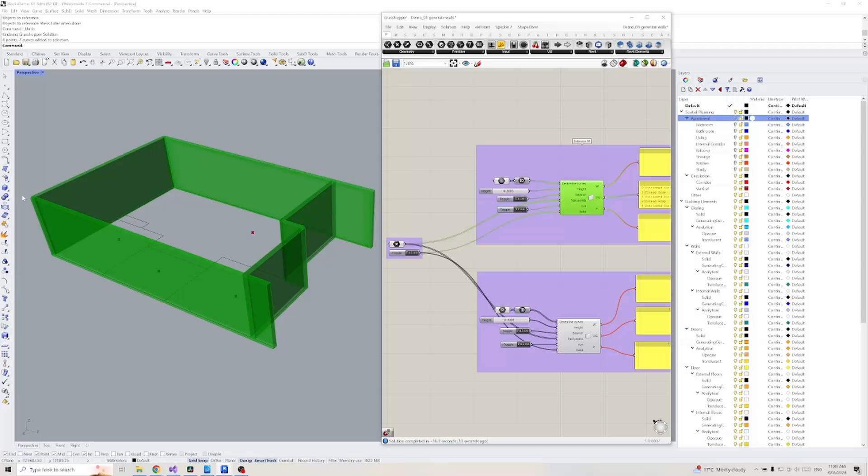On the last episode of Parametric Promethean, I showed you how I can draw lines and polycurves in Rhino and turn them straight into walls and rooms in Revit, and you can't, because you don't have access to my custom components, and I haven't found a way to sell them to you.

If you don't know what the hell I'm talking about, go back and watch that now. I get it, everything's made of glass!

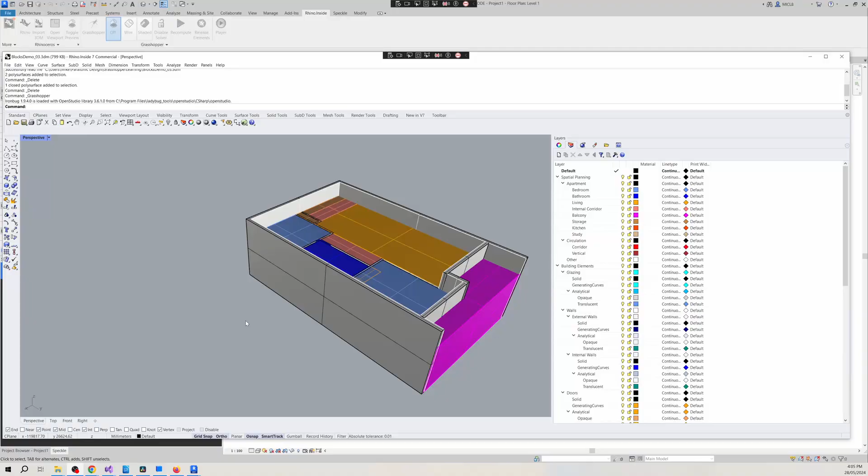Last time we got up to about here where we had our rooms and our walls. There's something not quite right about this building. It's flawless. No, I don't mean it's perfect, I mean it doesn't have any flaws.

All the walls and the rooms are just going to fall down. Luckily, Rhino doesn't have to conform to the laws of physics.

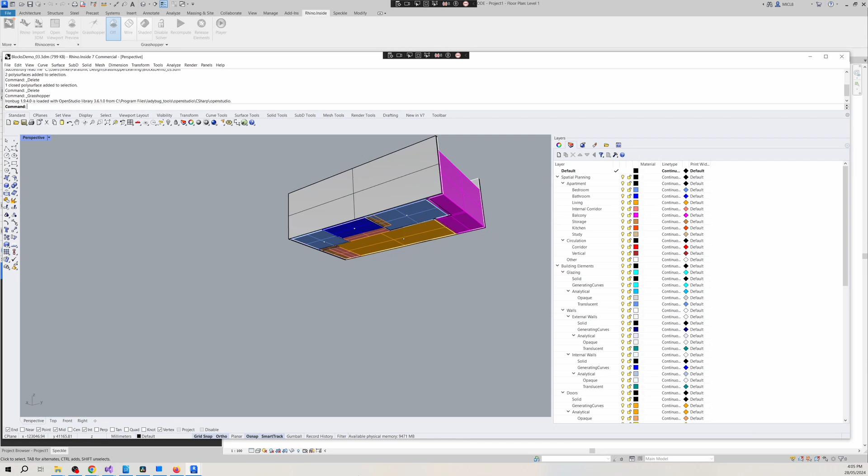But let's put a flaw in anyway. That's why I created the Create Flaws custom component.

As most of you probably already know, in Revit we typically draw flaws using this tool. But just in case there's anyone who's a total Revit noob watching, I'll dumb it down for you. Go to the Architecture tab, click Flaw, dropdown, Flaw, Architectural.

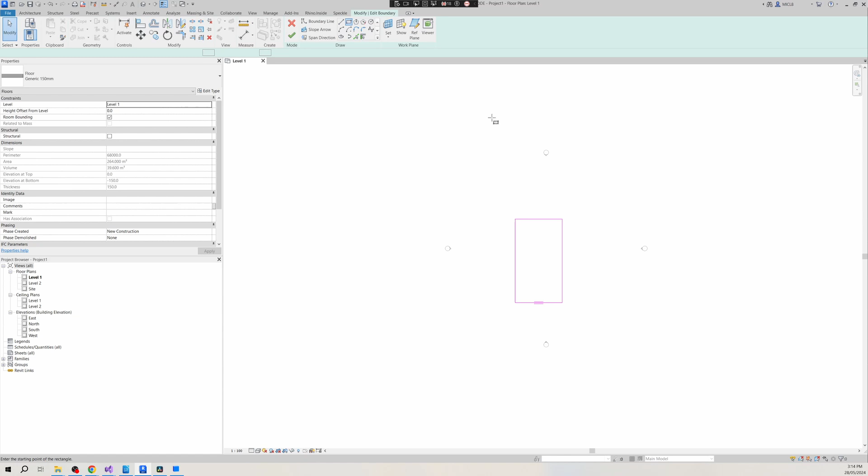Draw a rectangle with a magenta line, hit the green tick button. Hey, we have a flaw. But sometimes Revit flaws are actually composed of multiple objects. See? It's one element, but it's got two different solids in it.

And that's why converting from Grasshopper is not as straightforward as you might think, if you just had one solid compared to one element.

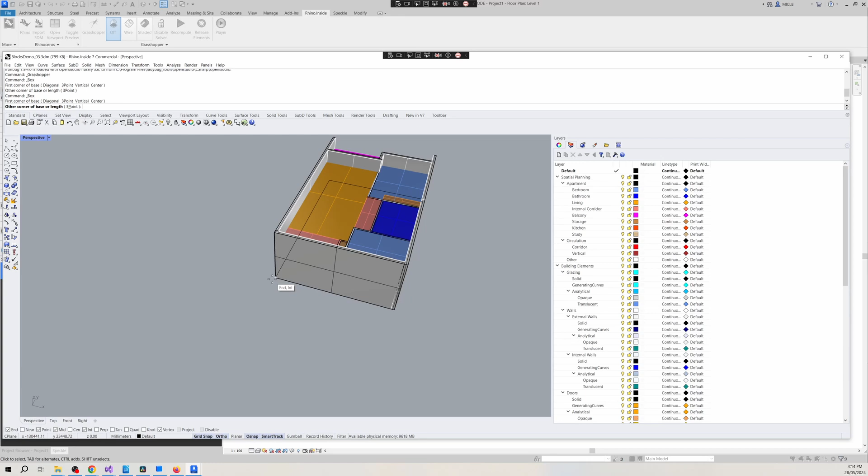We could generate this in Grasshopper, but for the hell of it, let's just draw it manually with the Rhino out-of-the-box tool. Just get this box, draw an extrusion, let's make it 200 millimeters. And we're going to need a ceiling as well, so we can just copy that upwards.

Actually, that probably pissed off some of the Revit pedants out there. That's not a ceiling, that's just another floor on the next level.

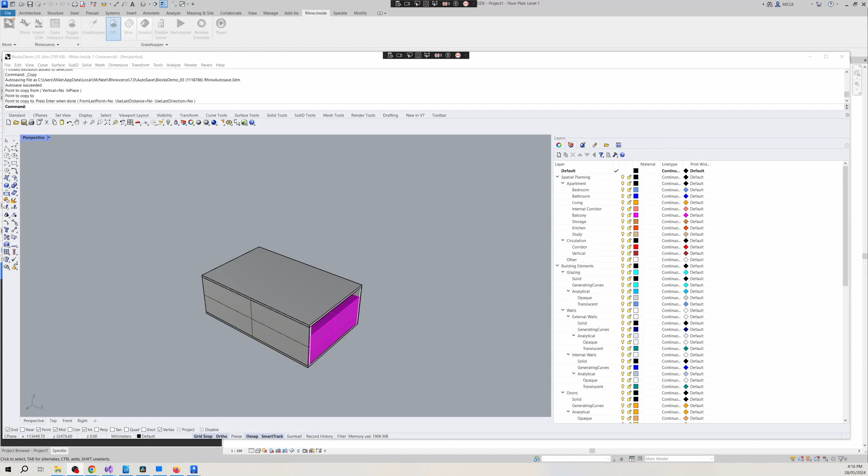And just to illustrate a point, I'm going to grab this and make a couple more of them, just put them over here. Let's go to our gumball, and just so you know they're not the same one, we'll stretch them.

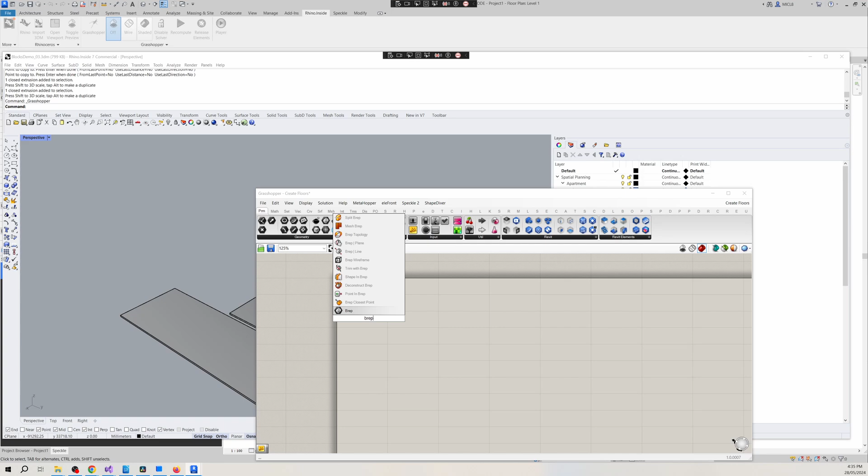Okay, we're going to bring these in as breps. Tango, I thought you said you weren't co-hosting.

And we're going to be building a Grasshopper tree structure. There's a few ways to do this, but I like to use this stumpy one over here: flatten tree.

And let's give it a panel so we can give it a number. Shrink that down. Let's add another panel so we can see the output.

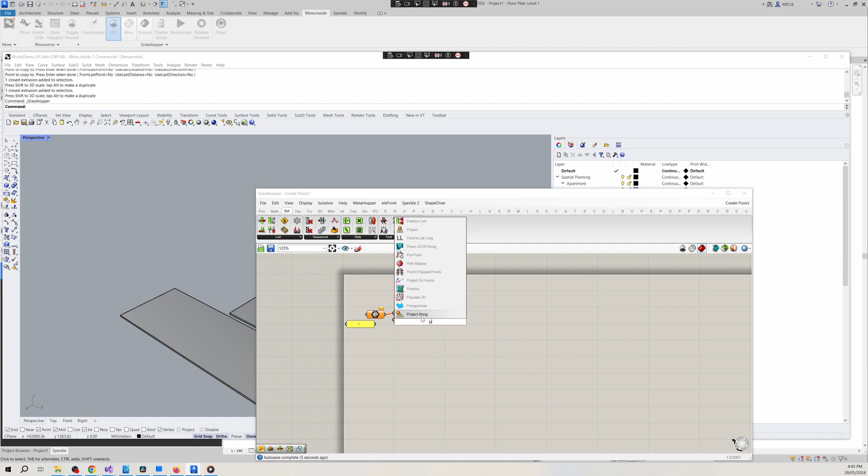Let's set that one brep. Okay, bring that back. Now let's group that together.

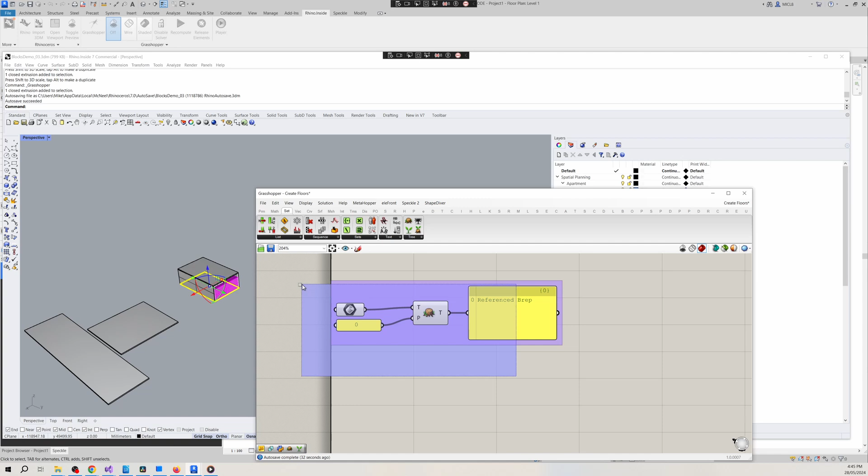Make these line up pretty for all the people out there with OCD. Okay, let's make 3 copies of this one.

And we're going to name them 1 and 2.

Now this one we are going to set to be the one on top, and the other 2 are going to come here with a set multiple breps.

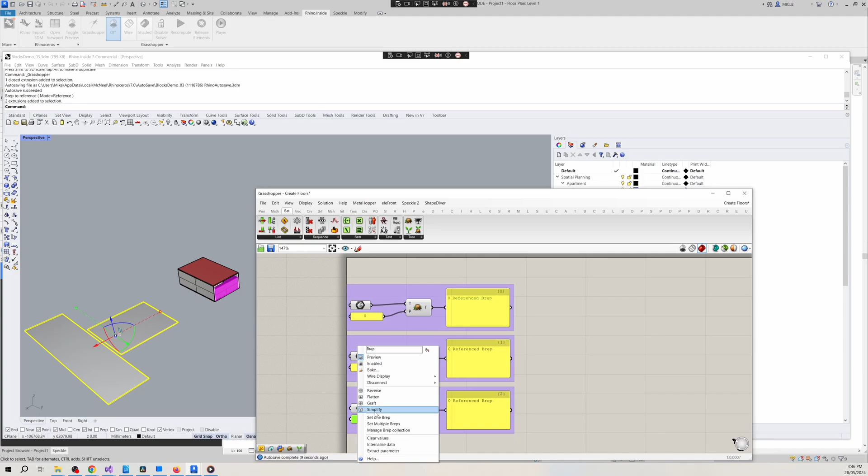We're going to get one of these squid thingies, and we're going to build a merge. For some reason it always adds an extra one, which is a bit annoying, but anyway.

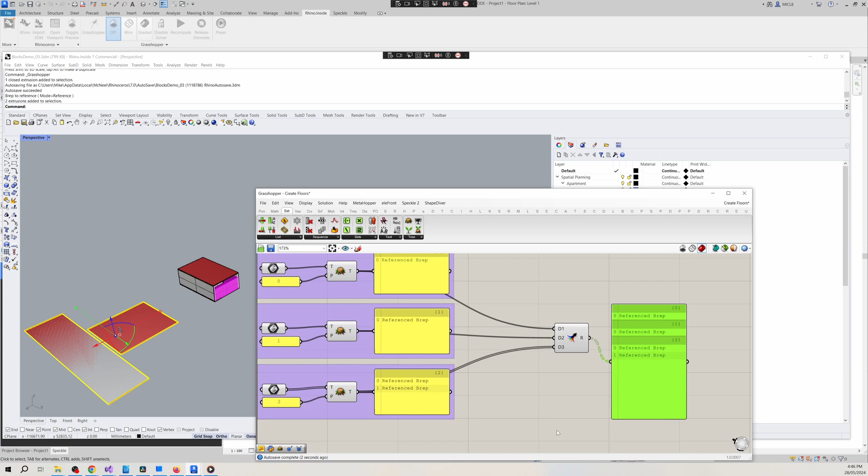So now we can see that we have 3 branches to this tree. The first 2 just have 1, and the third one has 2.

So now that we have our geometry sorted into a tree, it's time to use the New Floor Blocks component. This takes in the geometry as a tree, and it takes in a boolean for whether it's exterior or interior.

Now this is going to be useful later when we're going to do our environmental analytics, because an exterior floor would be something like the part of the slab that is on a balcony, which would form a shading, whereas the interior floor might be the thing we're actually trying to analyze the lighting or the thermal performance. That'll be in a future episode.

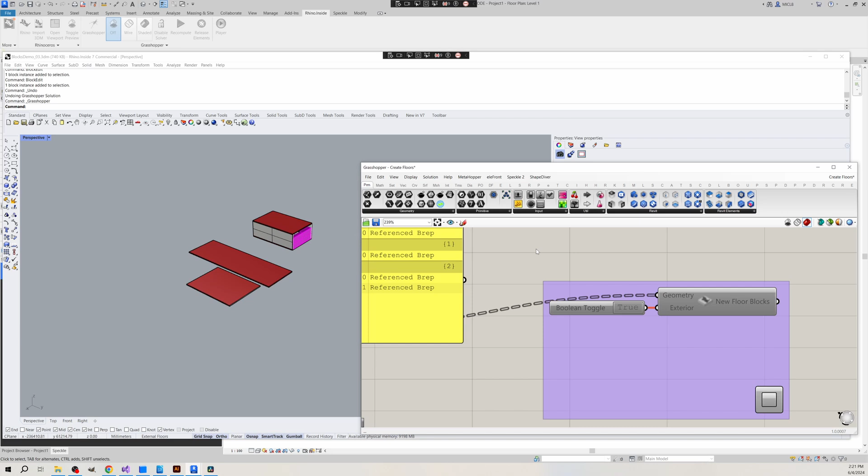Hit the boolean toggle, and here we go, we've got our floor blocks. So you can see that they're numbered. They're on external floors because we said they're exterior. And in the user strings, we've got some metrics like the volume, the perimeter, and the area.

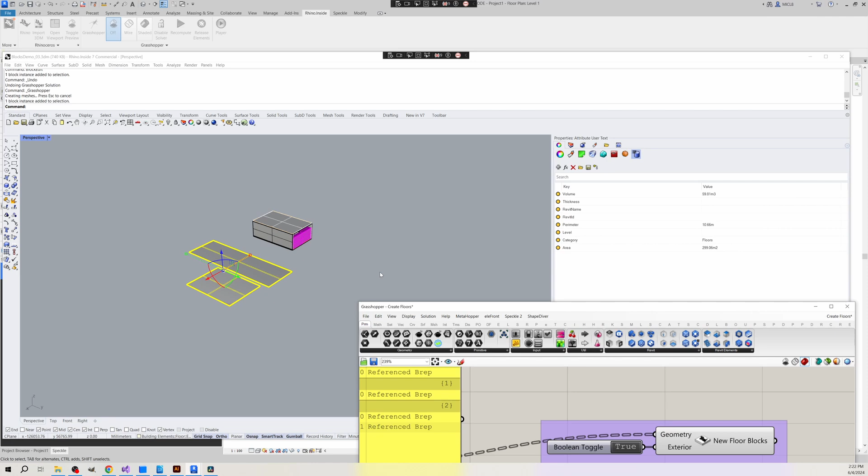The other stuff's blank for now because we haven't put it into Revit yet. And if we crack it open with a block edit, we can see that there is a poly surface on the solid layer, a planar brep, which will be for the analytical surface, and the curves, the border.

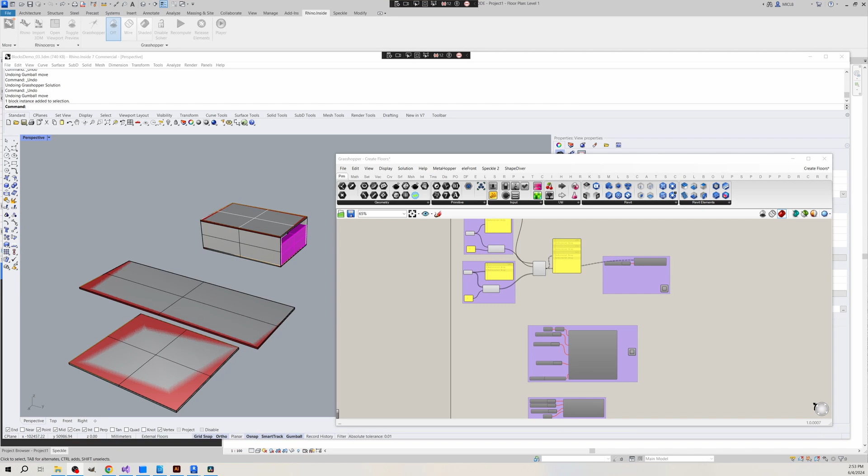Okay, now we're going to send them up to Revit with the same component we had in the last episode. I've made a few changes since then, so I'm now able to sort out what's a new wall, a modified wall, or a failed wall, and the same for the floors, windows, and doors. I think that'll be enough. That gives us the basic elements we need to make a building, at least for analytical purposes.

We've also got a Revit ID mismatch. That's if you were referencing an element which had a valid ID but it's the wrong type of element. So let's say it said it was a floor in the Revit model and it was a wall in the Rhino model, then the script would get confused, so it's just an out for that. The new levels, that's if we generate any levels, and that relates to the level generation threshold, which I'll show you in a minute.

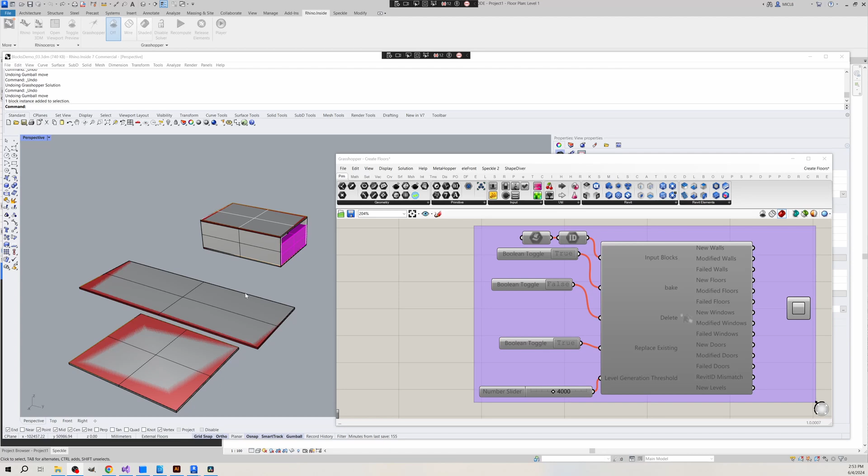Okay, so all we have to do, again, we just grab our blocks, set multiple blocks, Boolean Toggle. There they are in Revit.

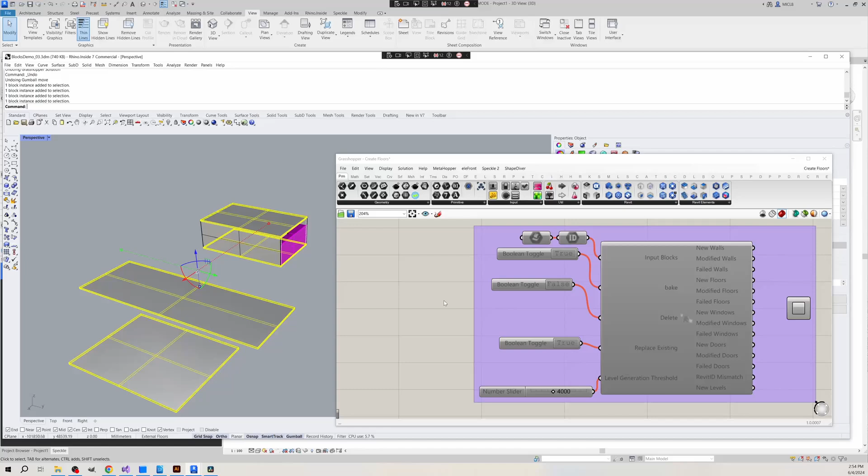Now we can make changes in the Rhino model and we can run it again. So if we, for instance, want to make this block a bit bigger, and we were to get the poly surface and stretch it out, and we have Replace Existing on true, hit the Boolean Toggle to run, and there we go. Now this one's a lot bigger.

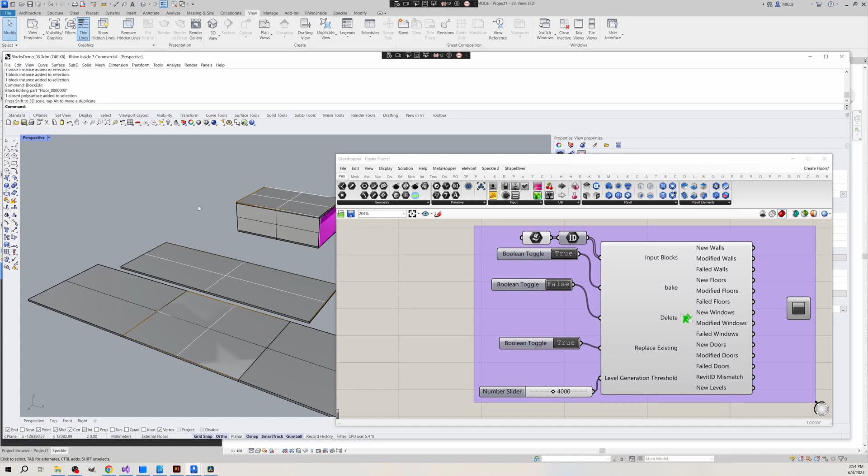There's other changes we can make too. So let's say, for example, this one we wanted to lift it a little bit higher, like the level had an offset, and we run it again to recompute. Let's go to this view, zoom in here, try and grab the level thingy, drag it across so you can see what I mean. Okay, this now has an offset, but what if this were a lot higher?

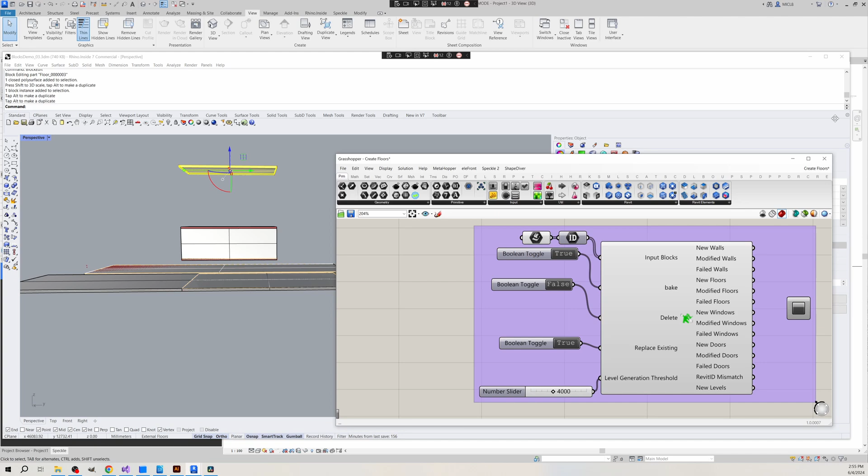This is where our level generation threshold comes in. So we've set it to 4,000. So if we lifted that up quite a lot, looks like at least 4,000 there, and we run again, see now it is up there. It has a height offset from level of 0, but it's on level 3. Level 3 did not exist in this Revit document until my script ran. And again, if we grab the level thingy over, then it's now sitting there.

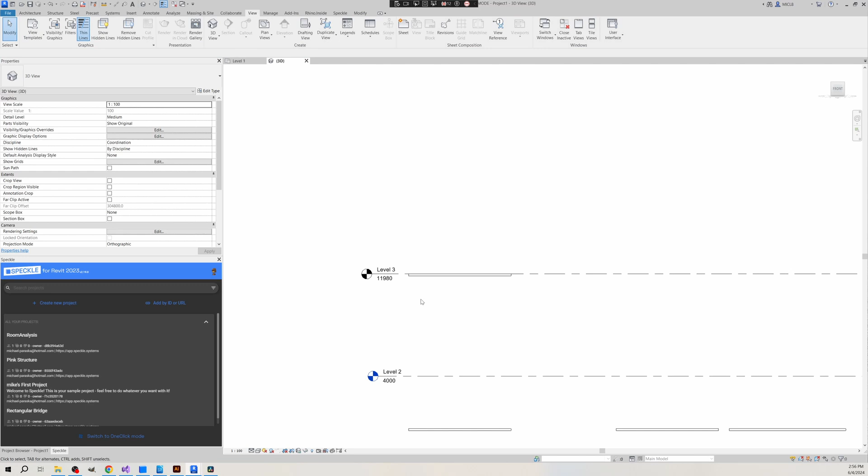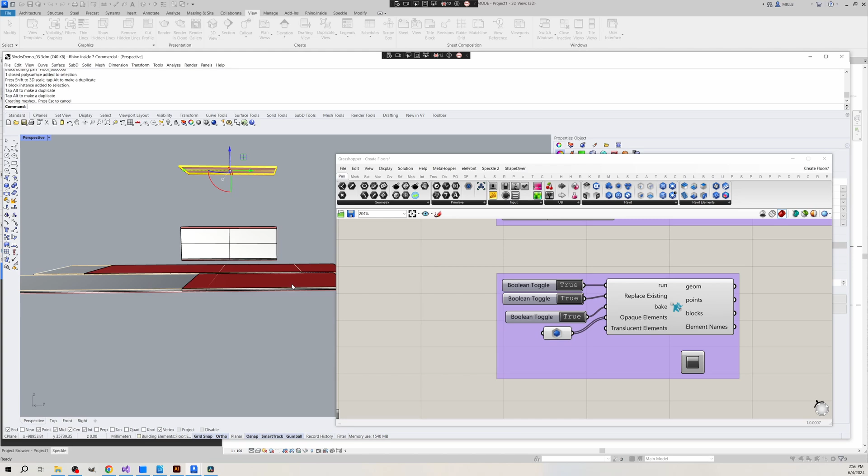Okay, now you know what's next. Going back the other way. Boolean Toggle off. And selecting some graphic elements. Yeah, grab them all, why not? Finish. Hit the boolean toggle. So now it's overridden the geometry of the Rhino blocks with the geometry from the corresponding Revit elements. So we could actually do a whole Revit model this way, building all the levels from Rhino.

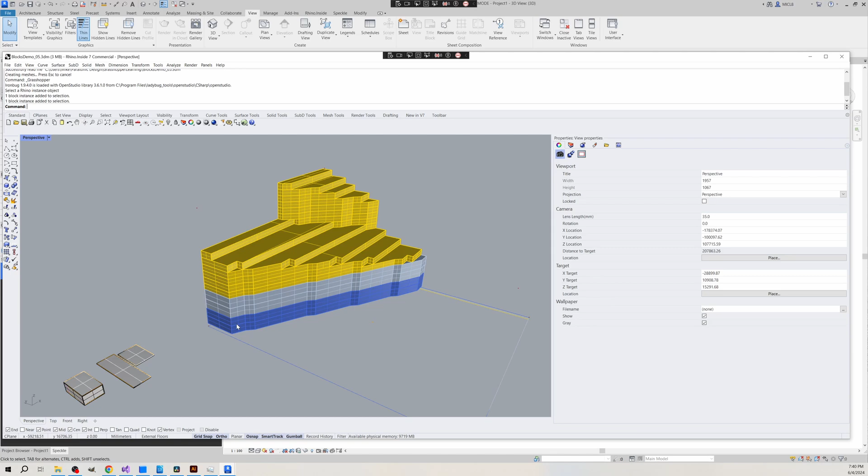So if we load up Grasshopper, I have here a model from another project. It's a funny shape because it's all being cut by a solar plane. So this was the one where we had the urban planning and it was able to generate the building shapes using solar planes to give you your maximum footprint that would not overshadow the nearby park.

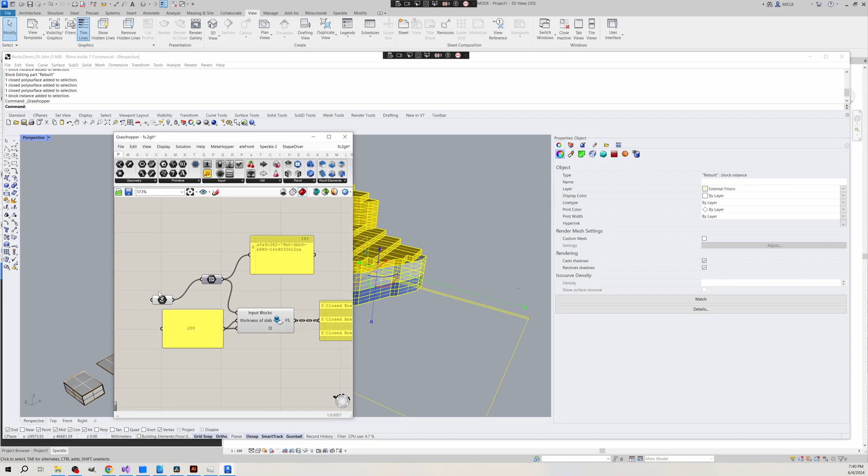What we have is a block, and inside there are extrusions which are floor-to-floor massings, and the different colors represent different types of architectural program. Okay, so if we go to Grasshopper, I have yet another custom node here which extracts from this and creates breps. And if we just hide it, now we can see that the extrusion has a thickness and also has an offset for the exterior shell of the building.

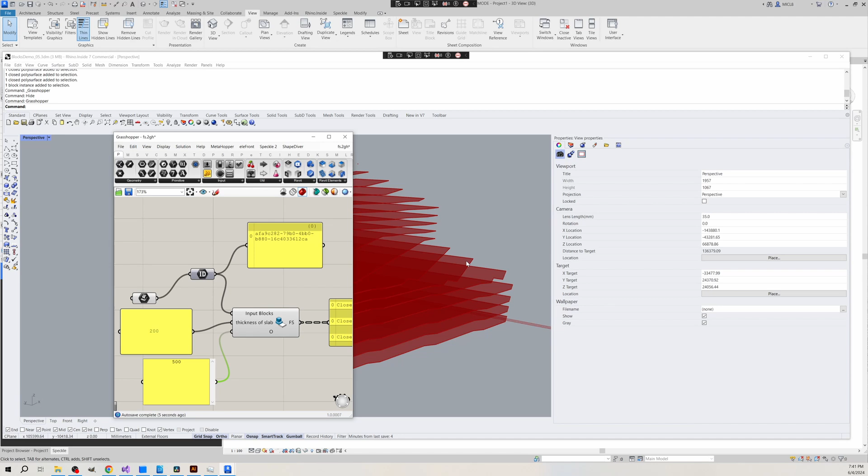So if we made that really obvious, then our floor plates are going to be even smaller. So these are already in the tree format like we had before. So all we have to do now is set the group toggle, and again we have our floor blocks. Now we've got to convert them over to Revit. So rather than reconstruct it from scratch, let's just go the other file from before and copy and paste it in.

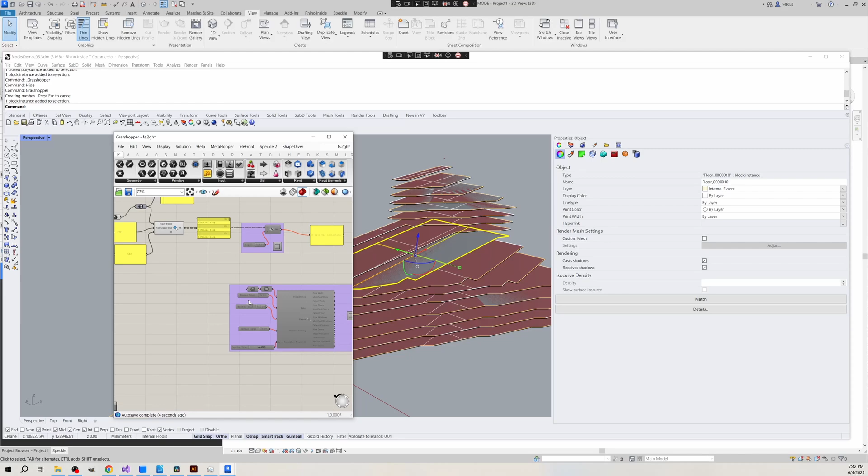And we grab all of these guys, we set multiple blocks, and we turn the group toggle on. Now our Revit model has all of those floor plates and all of those levels.

And so here we are at the end of the episode. It would have been good if I had a bit more feedback from people actually to the content rather than just to the intro. Some people that did reach out were wondering why I didn't just start in Revit in the first place. I've seen projects like that before when I was an architect.

Put me down now, Mike!

Sorry, I can't really multitask by holding a cat and talking coherently at the same time.

Some people asked, why even bother with Rhino? Why not just go straight to Revit? It's a good question. The problem is, Revit is not really a design software. I know that statement's going to piss people off, but I'm going with it anyway. Revit is a documentation software.

Design and documentation are not the same thing. Design requires a lot more creative thinking, and a lot more flexibility. Documentation is about producing drawings and BIM models, and these things aren't the same thing.

If you're like me and you went straight out of high school into studying architecture at university, you probably never learned how to draw until you got to the workforce. At university, we mostly just used Rhino, because we were designing, treating a building like a sculpture. We were manipulating in 3D, adding color and texture and rendering, and that was mostly what we did. 2D drawings were an afterthought that you kind of did in Illustrator at the last minute.